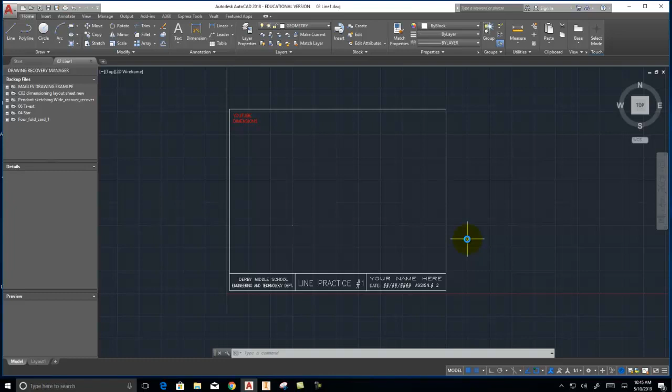In the T drive, we will have full files for you for this specific assignment. When you click on the file, you open up something like this. It might not have a title block, but you'll be seeing something that we've prepared for you.

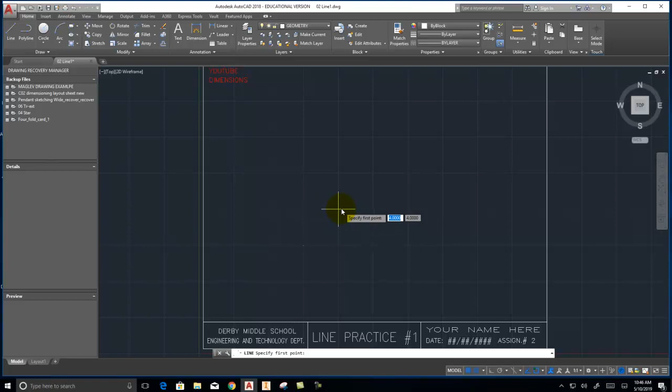If I have a drawing like this, there are a couple things that you need to notice. Number one, there's a grid in the background. This grid can be used to help you draw out things. So currently this grid is set to 1/4 inch grid, and the major grid is 1 inch.

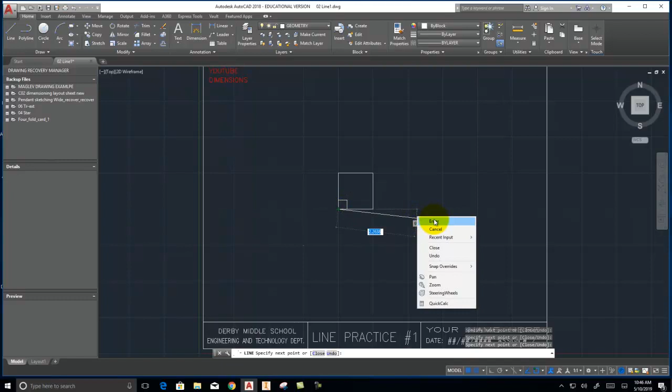So if I were to draw this square on the major grid lines, that would be 1 inch by 1 inch. The smaller grids that are in light gray are 1/4 inch. We can use our mouse to select things.

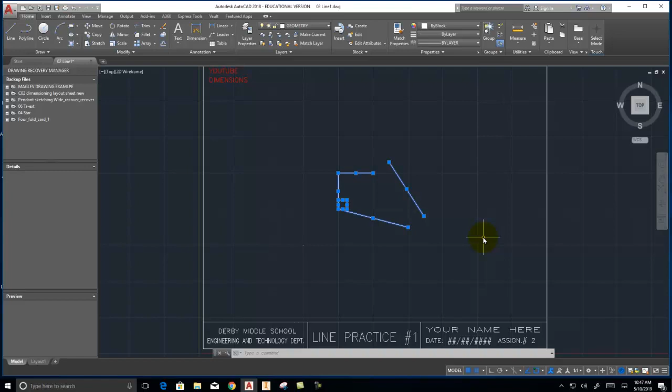You can see that each line will have 3 blue squares. The end blue square can adjust the end of the line. The middle blue square can move the line. When you have a line or circle selected, you can hit the delete button, not the backspace, but the delete button, and that will erase whatever you've drawn.

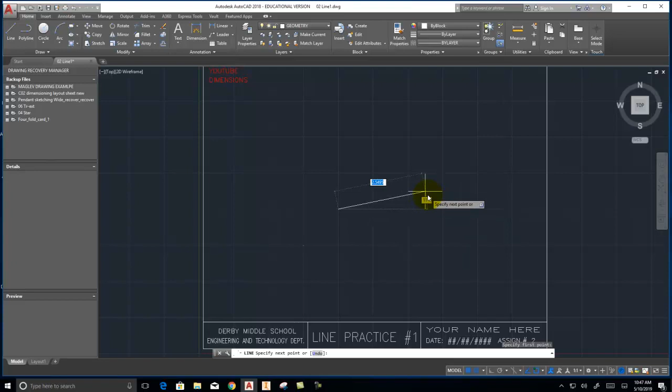The line command can be used to draw lines, and you can use a couple of different techniques. You can use the grid, but you can also use what are called polar coordinates. And so you can see that in blue on the screen, it shows the distance of that line. I can, at this point, type in a distance.

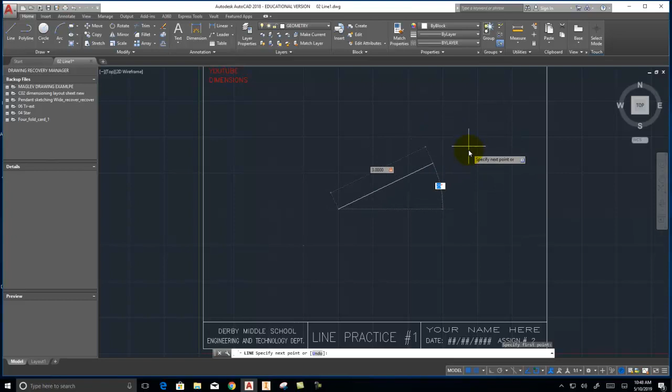If I hit tab, it will switch from the distance to an angle. And you can see how I can move this around and it will change the angle. So let's say I want a 3-inch line at a 45-degree angle. I can hit 45 and then I can hit tab again and it'll switch between the two. If I hit enter, it will finish the line and start the next line.

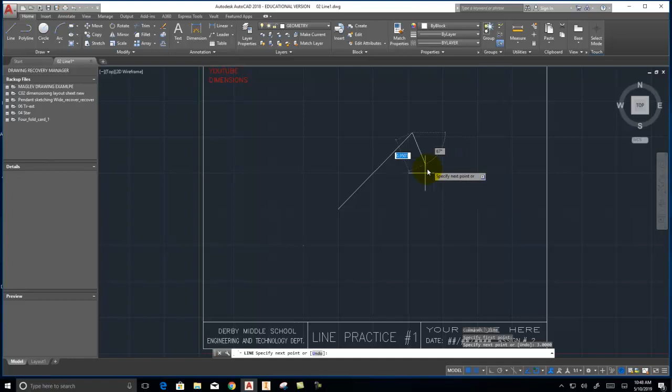When you're drawing, the mouse will snap to the grid. If you'd like the mouse to not snap to the grid, down here we have this little section of the screen. This will turn on and off the grid view. This will turn on and off the snap to the grid.

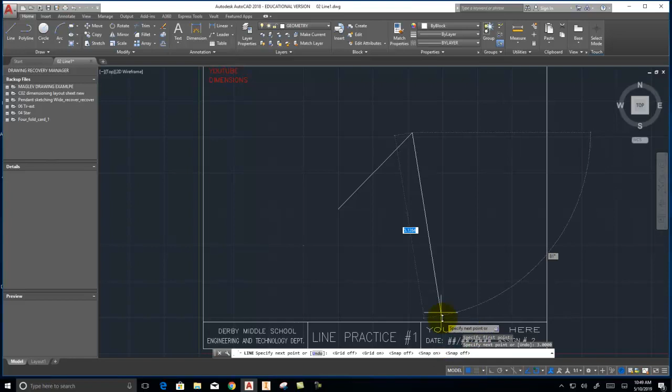So right now I'm drawing, but it's not snapping. If I turn this blue again, you can see that it snaps to the grid. I typically will leave the grid on even if I'm not choosing to use the snap.